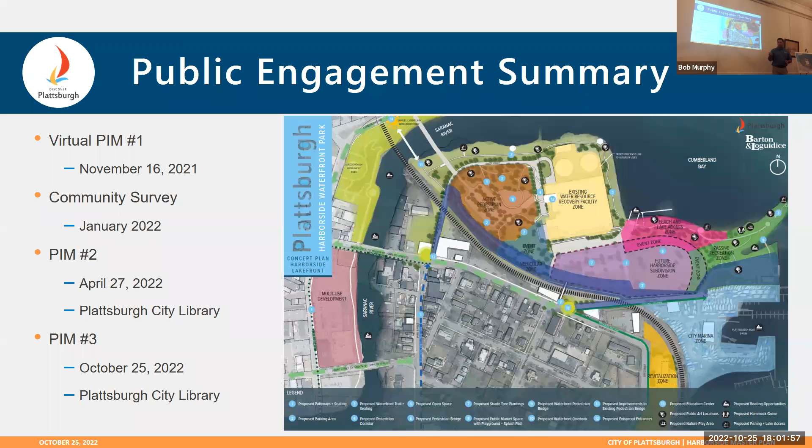We had a community survey, which I'll mention here. Here's public workshop number 1, and again it was virtual, it was recorded, folks were able to review it later, much like tonight. Our community survey was really a big hit as far as public participation. Everyone really had an interest in it and were willing to offer their opinion, which was great. We had about 1,100 responses over that 2-week period, I believe. We promoted it both on the city website and on Facebook and numerous other sources.

So anyway, we received a lot of great feedback on our initial conceptual plans. 53% said they don't visit Harborside because there isn't enough to do. 53% also said that for Harborside Lakefront, they access it via Dock Street, 22% via Green Street. We were able to get information about how folks get to Harborside and what types of amenities - about 70% said Harborside is lacking in passive recreation. Passive recreation is like picnic areas, nature trails, things that aren't really formalized, organized recreation. That was something desired from Harborside.

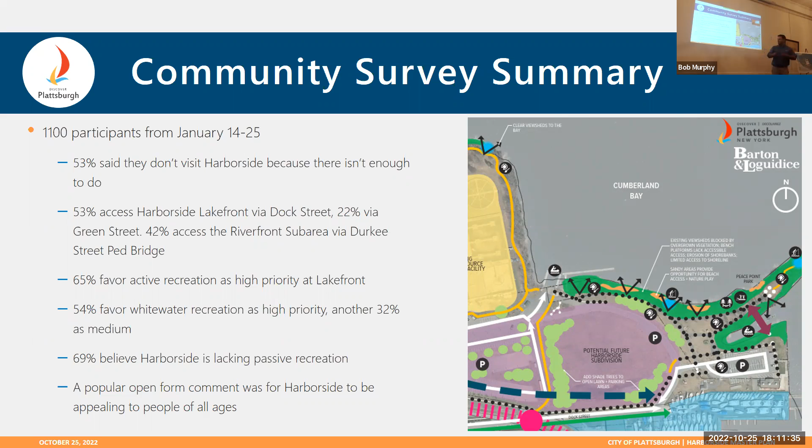So let me move back to our public engagement here. That survey, as I mentioned, occurred last January. We had a workshop in this very room at the end of April to go over some of our proposed projects, where we saw some positive and negative feedback.

You see these red dots and green dots. Red dots were where folks put ideas they didn't like, and green dots on ideas they did like. This had to do with putting hydraulic rapids in the Saranac River. We got mixed results, so this is an example where you don't necessarily take every single piece of feedback and do exactly what it says, because you have conflicts there.

This points to the need for a specific study about whether that's feasible with the DEC. We've seen it elsewhere in the state where they have hydraulics for whitewater rafting type excursions, not everywhere, so that's where this conflict merits further study. That's an example where we saw some negative feedback.

We also saw some negative feedback on the idea of hammock grove per se. We took that into account, and while we still think there's possibility for that to be a good idea, we've removed it as a permanent feature.

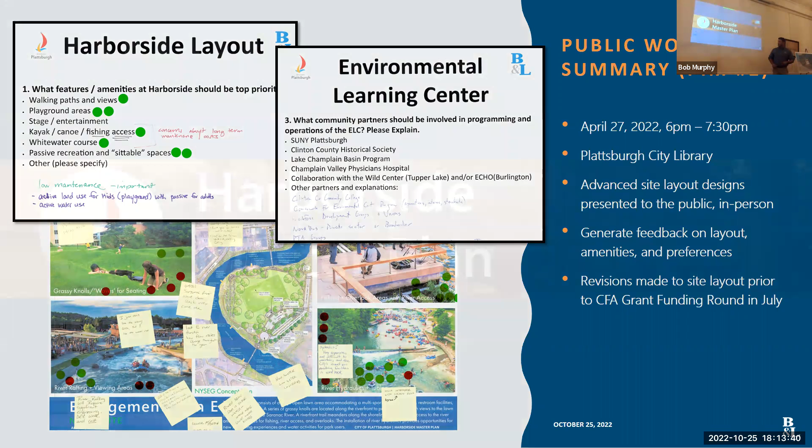We made revisions, which helped us prepare for that CFA round in the summertime, which I'll get into in a minute. Right now I'll run through briefly, because we have the plans here, and I don't want to take too much of your time. Those watching online will have the plans available along with this posting. I'll run through the seven different phases of the site layout, along with the more detailed elements of the environmental learning center.

First, our master plan document ties all of this together. There's a prescription from the Department of State that maps out what we need to provide in document form. Not the most exciting thing to see visually, but this is the product we have to produce.

This is where we're going with our work product, but all these components you see here are the content that goes in. Just wanted to make sure you saw what our work product was from this.

Here we have the overall site layout for what we call the Harborside lakefront sub area, with the landmarks you see here, the wharf taking up a large chunk. We've reworked the parking area and pedestrian and vehicular access throughout the site, all the way around from Green Street to Dock Street, the Marina, the Naked Turtle, Peace Point Park, out to the northeast. We've maintained the public boat launch, and some space for future development. This is your overall site map of the Harborside.

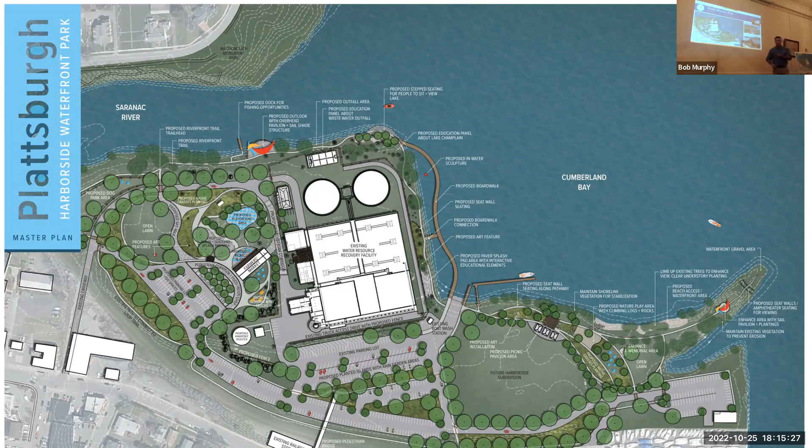So the first phase we proposed is circulation improvements. Currently, the access road coming down Green Street around the wharf takes you right along the water back to Dock Street, closer to the Naked Turtle.

And that poses a couple of problems because you're really kind of reserving prime waterfront views and access to the water for cars and asphalt, which aren't even used by cars all the time. What can we do to bring that more for people to use, to get views that are more scenic, opportunities for events on the waterfront that aren't there now because the road is.

And to do that, we propose bringing the roadway closer to the train tracks. The train tracks aren't going anywhere. Let's put our negative asphalt sort of uses closer to the tracks, consolidate them to leave more of the site for recreation and scenic uses. We've done the same with a perimeter trail that takes you along those tracks, but also along the waterfront itself, even around the wastewater treatment plant, in the water via boardwalk.

That would have to change in order to have public access. Public access is already down there with the farmers market. So there's a lot of permitting that would need to occur, especially for the boardwalk piece to get out over the water. But it's certainly something that occurs elsewhere.

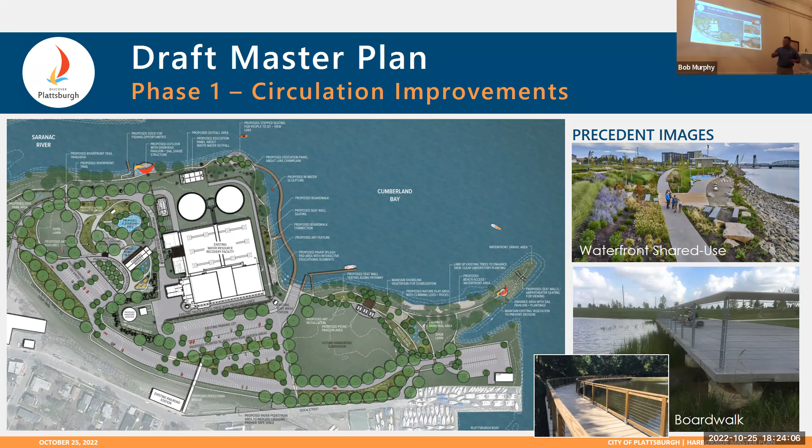So that building cannot be touched for the next five years. It's five years, right? Oh, that was the five years—that's the fallback. So here's just a more detailed look at that circulation plan.

Is Green Street the preferred way, or is it Dock Street from Bridge Street to Dock Street? Well, as Matt said, there are ongoing studies about realignment of Green Street, but that's still the closest point to downtown, pulling from other trail networks as well. But we do have access off of Dock Street too, so we have both sets of access points.

And not pictured here is the pedestrian bridge going over to McDonald's as well. Because I truly think it should be the shortest road between downtown and the rest of it all. Yes, so that's what we show here, though there's further study about the actual alignment.

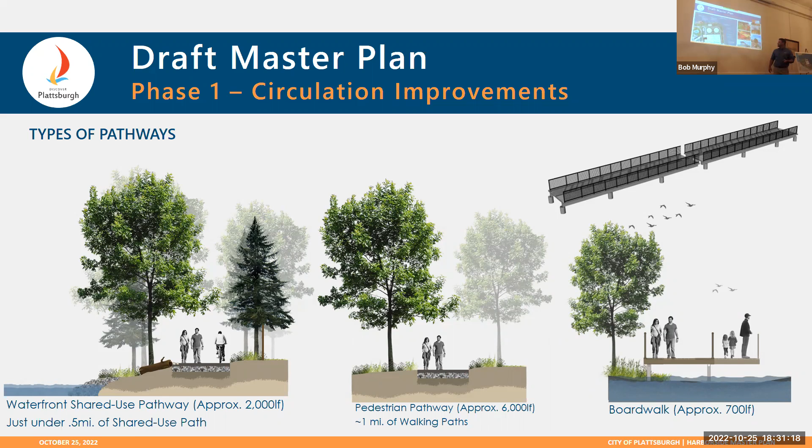So for wayfinding signage, I'll move through this pretty quick. The city has already gone through a wayfinding signage project, and our intent is that any signage coming into this site would follow the same themes. We don't want to reinvent the wheel. However, we'd like to see some unique interpretation to show that you're at Harborside, whether that's its own icon or just a different color to showcase the Harborside area compared to the rest of the city. The city has already gone through this process, so I don't want to reinvent that wheel, so to speak.

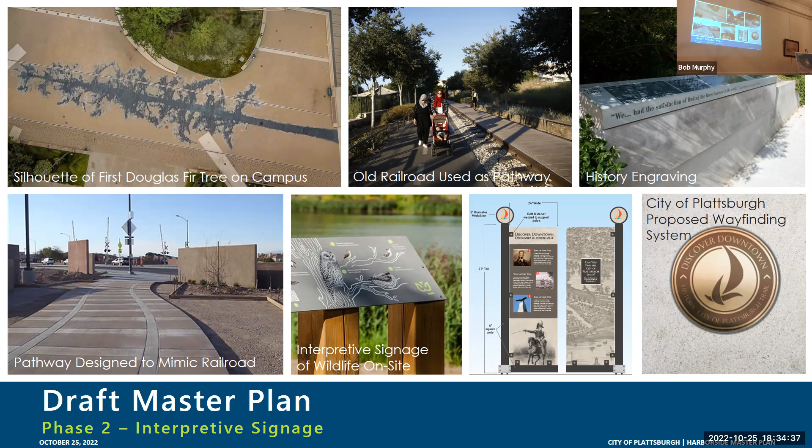We also have an open lawn over here, and if a community group wanted to do something like set up tarps and boards and put water in there to freeze, that's something I've seen at parks across the state. It's something that could certainly be done at that open lawn area.

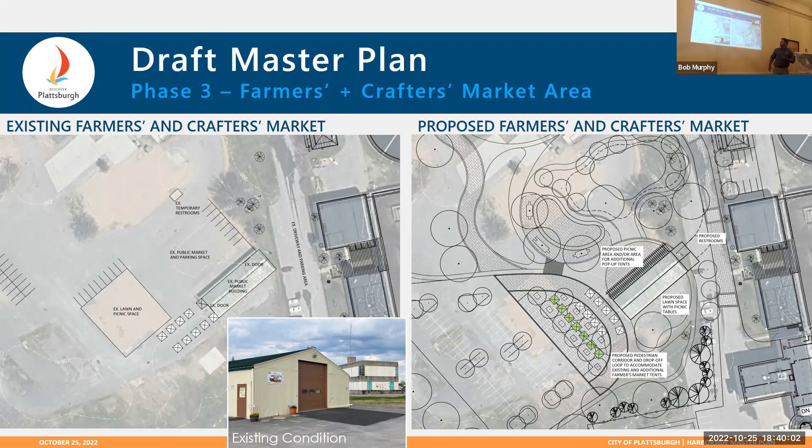Thank you. So I just wanted to give some more detail about the open lawn area and proposed playground area. Again, this informal plaza with spray features is what we're talking about in the area immediately adjacent to the farmers and crafters market. The point is, we have a lot of folks going to the farmers and crafters market already and they bring their kids down. There are open areas now where they kind of play, but not a formalized area where young families can know, oh, I can go down, pick up some local produce while my kids use the playground.

From a previous workshop, maybe you're still going to get to it. There's going to be improvements to the facade of the sewage treatment plant, so it doesn't look so much like a sewage treatment plant. Yes, that would help. So I'll get to that in a minute. It's really more about the environmental learning center, which is part of it, but that facade work is going on to the remainder of the wastewater treatment plant under a separate project. So I don't have a lot.

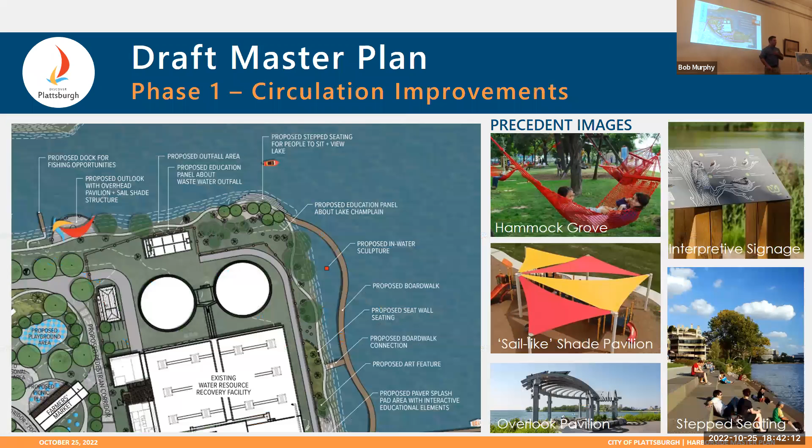For instance, let's see if I show you, and get back to it. So this area, there's a whole new facade designed through a separate project, B&L's on that, but that is also moving, just wanted to let you know that's moving as well. But we'll have other images of the environmental learning center, which is the part that faces Green Street.

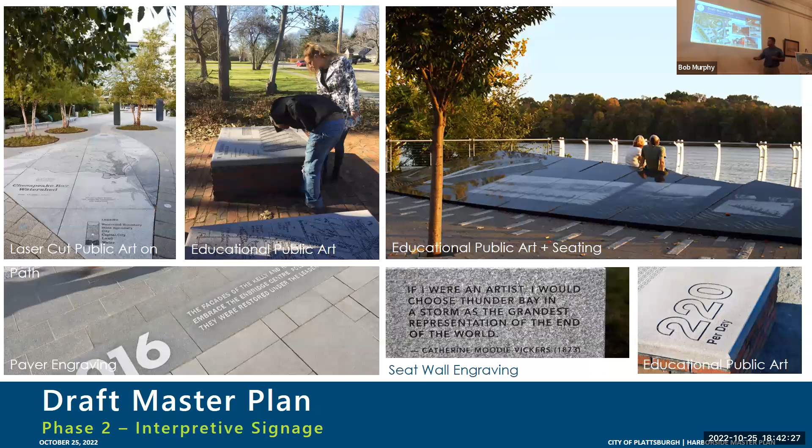Something else to keep in mind is that, as you mentioned, there are trucks that still will need to get down to the wastewater treatment plant through this proposed pedestrian corridor. That'll have to be carefully managed. Right now, the trucks do not go down there on Saturday mornings for the farmers market, and that sort of arrangement can be made for other times of the week where there's a lot of activity in this area of the Harborside area. So that's the other thing, this is going to continue.

Monday through Friday, when people go down, and we can do it, at least during the day. The environmental manager of the treatment plant has data on the amount of trucks that come in on a daily basis, and when they come in as well. No, I don't doubt that they do everything to be utmost. The issue is that it's unfortunate, that's where it is.

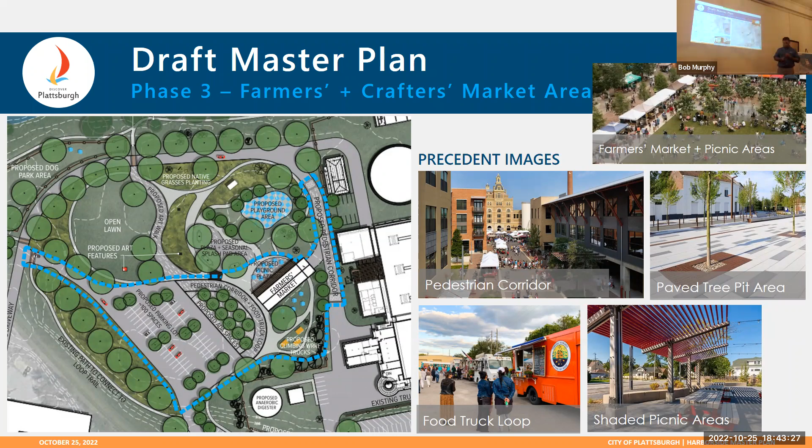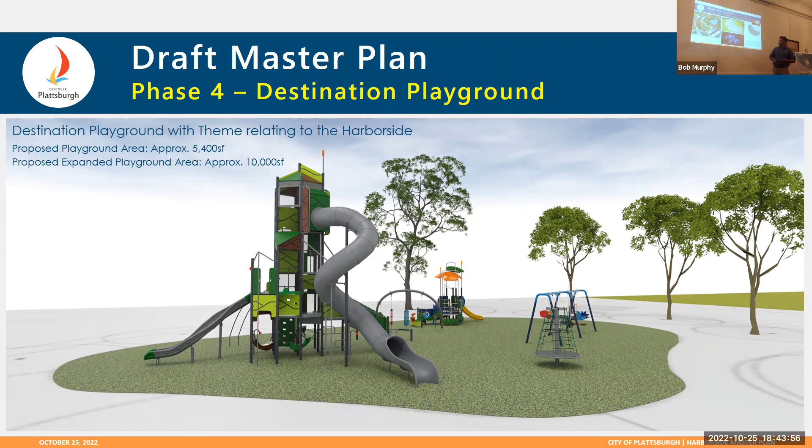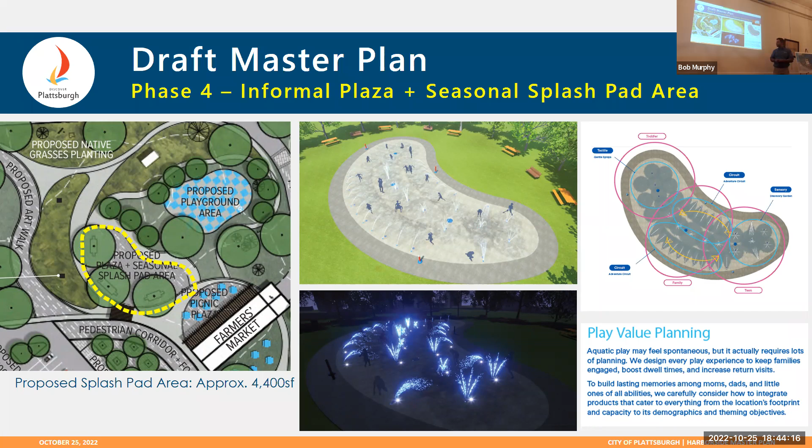Let's see if I can play this video that shows you — I think it's a video of how the splash pad fits.

Again, this would be near the farmers market area, operating in the warmer months — you're not going to have it out in October — but just as an attraction in itself, as well as supporting the farmers market and the activities that are already going.

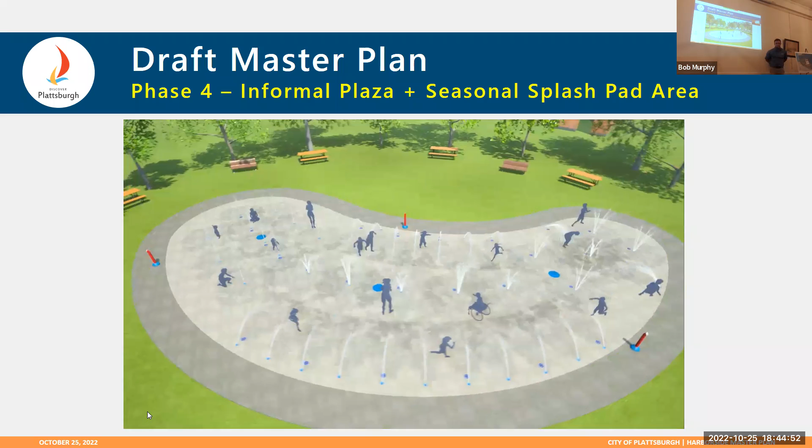And city workers keep this up during the issue. Yep, it's city-owned property.

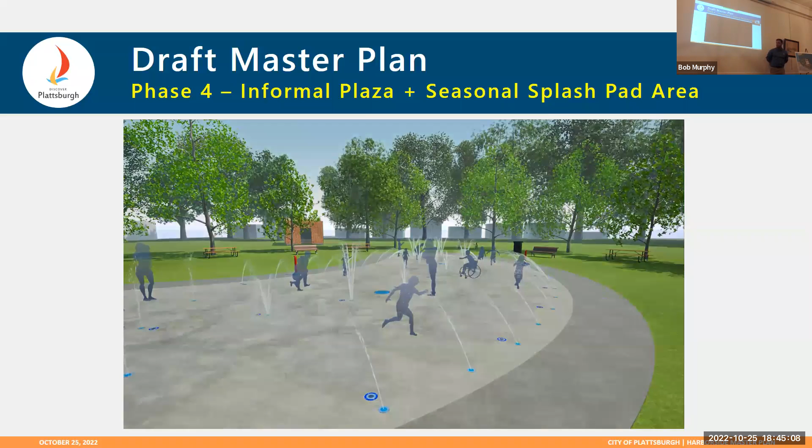And again, you can turn off the water for 9 months of the year. It's a lot of investment for those 9 months if they're not using it, but it's actually been pretty cost-effective, because it's a better alternative to put a pool. So that Department would take care of that.

I'm not sure which city department would — Public Works, yeah, it would have a public works. Which is usually how that would work — we have a plumbing specialist who does the open and close each year.

And so it uses a lot less water than pools. Compared to a pool, it is cost effective. Yeah, the flush on the pipe.

And then just phase 5 here, we'll move through these a little quicker as we get closer to 7. Just being able to better access the views and the water itself, this stretch of the shoreline going out to Peace Point Park was an important feature here.

You also see a pavilion and picnic area in this space here. You also notice that we've left this future Harborside subdivision piece kind of as a blank slate, at the end of the parking area now. The thought there was that it could be open to future development.

We wanted to keep the roadways on the backside close to the tracks to maximize the utility of that shoreline for recreational uses.

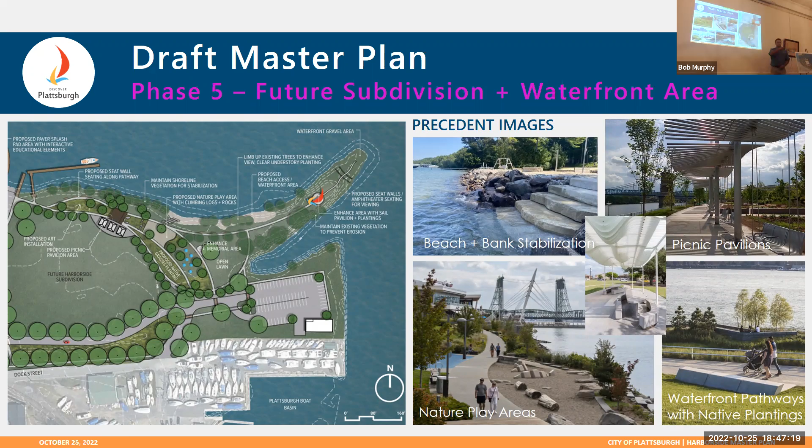Then moving up the river a little bit, we have what is known as the NYSEG site that's currently being cleaned up, and I know that is also in a state of flux as to what level it will be cleaned up to.

But the idea we've shown here is connections for the Saranac River Trail from across the Saranac River — these bridges, I believe, are open today.

Along with trail networks connecting the two, we've proposed basically a flat green space for the bulk of the site that could be used for maybe soccer, youth football, just an informal grass area, because we're kind of unsure of the future of that site from a cleanup perspective.

But we do have access to the water up and down, if you look at these in closer detail. We've also included provisions for hydraulics to be able to do some whitewater rafting in the river, should that prove fruitful.

We also present here the circulation path or network that we showed you before, with black being bicycle circulation, purple/magenta being vehicular circulation, red being shared use pathways, and yellow dotted lines being pedestrian only.

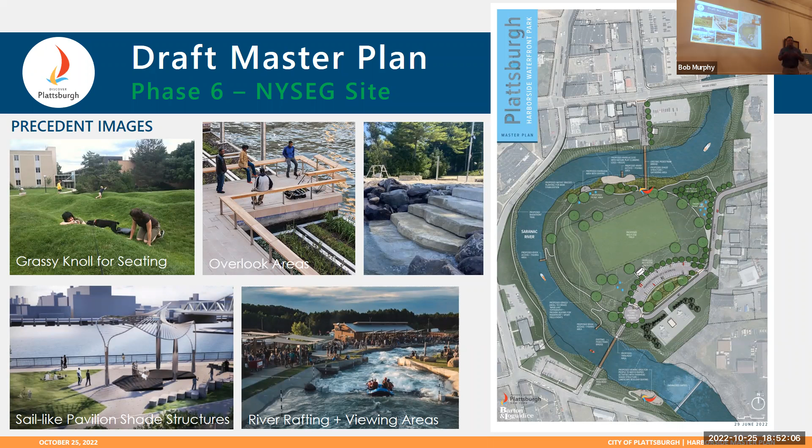So the Imperial Dam, is that going to be an issue? No, down the road, if it comes out, it changes the whole situation. I'd like to know the life expectancy of the building you're talking about, because even though it's the age of the building, there are some concrete issues and other stuff. I don't have an answer to that, I just think it's the same reassurance - in 10 years we're not going to be saying we can't move it, but we've got to rebuild it. As far as that goes, the hydraulics is a study away, it needs more specific study.

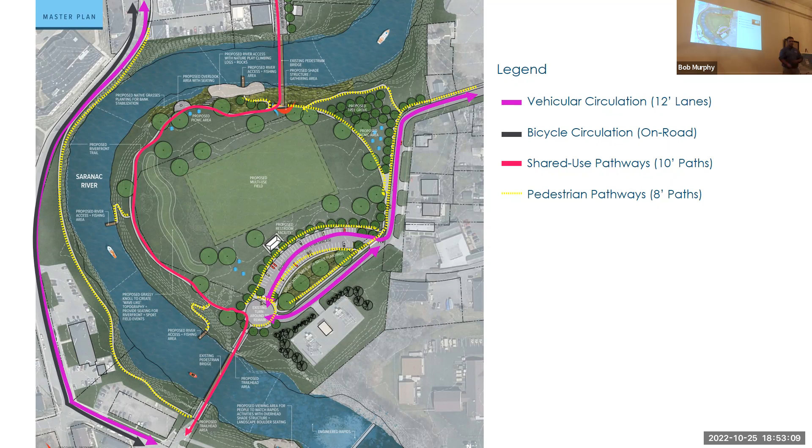But that's something the city has expressed interest in. I think it makes sense to take advantage of the room, but if they're going to rebuild it, that's a point. Well, which one? Yep, the one close to the lake - they already kind of took that off. Yeah, it did exactly the same thing.

So we're going to move on to the Environmental Learning Center, just to wrap things up here. This is the view from Green Street, looking at the proposed design. We're still in a proposed designs phase, but the idea is to have another vertical element that draws your attention from Green Street, from Bridge Street, from Dock Street to this area. You can see it from there.

Just for point of reference, is this like an ECHO place? Yeah, that's one of our case studies that we looked at. This would be focused on water quality - we're embracing the notion that this is where we clean our water, this is what clean water does, this is the process that takes care of that and why it's important. By the way, you can go on the tour - this is basically a mechanism for John to do more tours. It's a small interior space; we talked in committee about possibly having events inside, especially upstairs. The view is really nice from that walking deck, which this would be level with.

Again, having movable exhibit spaces to accommodate those sort of larger events. We do have dimensions, actually it's on the next couple of slides here. So there's just about 7,200 square feet on the first and second floors of this facility.

You can see this gray area is the existing wastewater treatment plant, and these kind of transparent boxes are where we're proposing infilling the environmental learning center. If you've been down there, there's that courtyard, when you walk in, that would be where the bulk of the square footage would be, the first and second floor mezzanine.

Is a view from that includes the... Okay, I don't, not in this presentation. That would be more, but we don't have the rendering that we see here. This is basically from the front, looking back toward the...

If you're looking around...

And then I just want to show you a little bit about the programming analysis that was done. Our sub-consultant had the exhibits, has done museum spaces in Buffalo, in Clayton, and elsewhere around the eastern United States, and they helped us sort of visualize how you would program something like this. I'll get more into what the next immediate steps for the Environmental Learning Center will be in a minute.

This is just kind of a notion of the different elements of water themes you could have throughout the space, ranging from cleaning to watershed, water cycle, water quality at the end, sewer and distribution exhibits, usage, and then on the second floor, some water appreciation. That's hard to see, it's a little blurry, and really workforce implications.

One of the things that came up in our meetings was the fact that these are industries that are growing, and there's possible employment for folks interested going forward. You don't think of yourself as maybe getting into that field unless you're presented with it. So you can see a real world example with all the staff already at work.

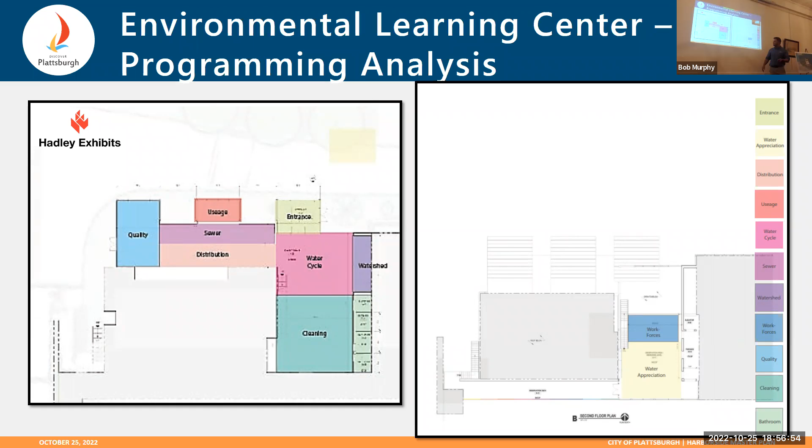So that was some of the programming layouts, just some example exhibits, because that's really where we're at, a point where there's a menu of topics to explore and levels of engagement. One thing Hadley brought up to our whole committee was that there are different ways to showcase information and to be interactive, and some require more maintenance than others. We've talked about that as well.

Has there been any feedback from SUNY or Plattsburgh City School District on any of this? We had a member of the SUNY faculty on our committee and discussed possible integration with the departments at SUNY, and then just members of the community on our committee. We've got to bring this together with the local school population as well.

They're going to be primary users for this, right? Well, many primary users see city workers doing all kinds of things, but they really don't see what's behind it. We'll have exhibits here as well to explain what they're doing in an engaging way, with different levels of engagement too, some exhibits work well for under 10, some work better for older visitors. That's why I was just curious if it's school-focused.

Hitting those fields is really hitting on all those levels, yes, in order to do that, which is a dying field. And that's another good point, that there's a professional certification aspect too. There's a need for that sort of engagement at that level, not just for kids.

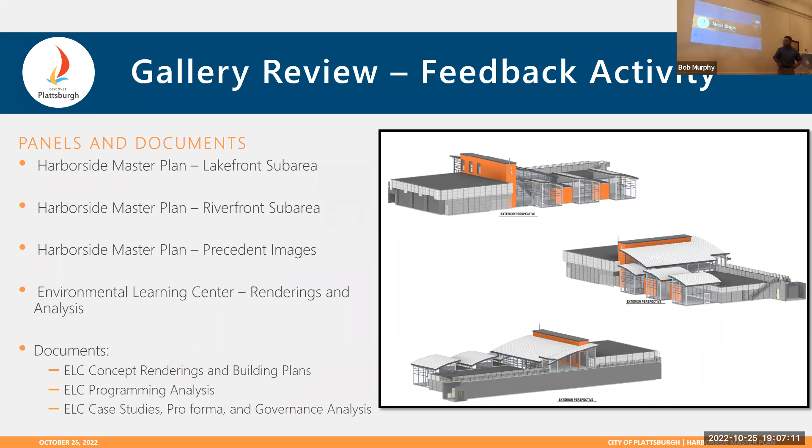As I mentioned, there's the Environmental Learning Center process over there as well. So just to wrap things up, we've got a lot of good feedback tonight. Please indicate some of your thoughts on these maps so we can make sure we have them recorded. We do have the meeting recorded, so we should be able to capture a lot of what we've discussed tonight, but the more we can get indicated, the better from my end of things. Then we'll revise our plans based on some of the things we heard tonight, and move to finalize them in the document over the next couple of months.

Those of you watching on the recording, we will be accepting comments online through a link I'm going to share with you tomorrow morning that we've posted on the project website, to offer comments on both sub areas of the Harborside Master Plan as well as the Environmental Learning Center. We'll be taking those through November 14th. We're finalizing that plan document over the last quarter of 2022, getting it to the committee for their review before it goes to the Department of State and then the City Council.

So those are the final couple steps. As I mentioned, we do have that outstanding CFA funding application that we'll hear yea or nay on in December. Just to give you a sense of grant funding going forward, that consolidated funding application consists of almost all state agencies and their funding, except for Department of Transportation. The deadline for that annually is July, and the award date is in December. So you realize all these awards, if it's funded, it's all taxpayer driven money, and of course, it's all...